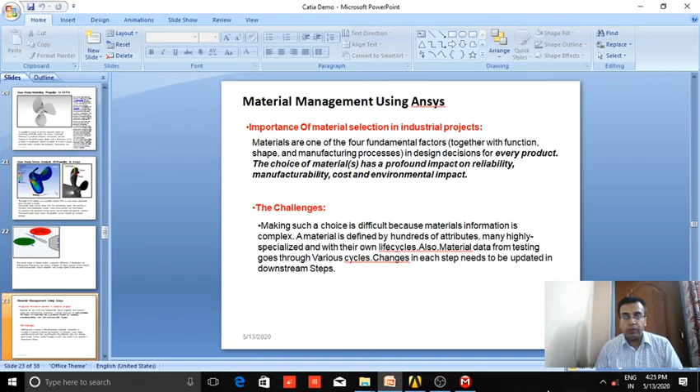Now we will discuss material management using Ansys. Now in industries, when any part or assembly of any product is designed, there are 4 important pillars that control its design. They are function, shape, manufacturing processes, and next is the material selection.

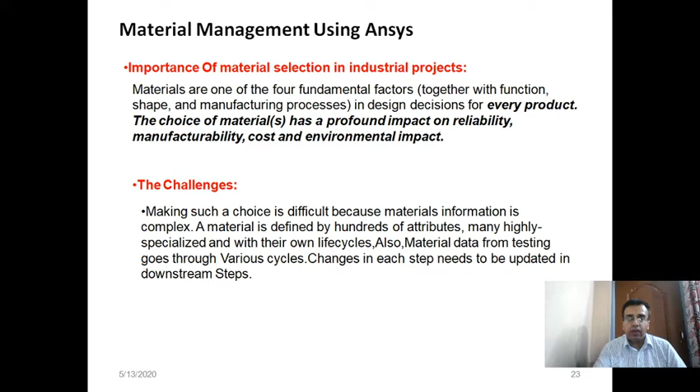And we also have to keep in mind that whatever data we are storing for a particular material in our company's database, along with all the properties we have to also incorporate the data which comes from testing. And if we make changes to any of the properties, what impact those changes have on the other properties and steps, this we also have to keep in mind. So this data needs a regular update. So that is another time consuming part.

The next challenge is to maintain a proper connection strategy between these factors. Now let me explain this cycle. This cycle basically starts from the render properties. Render properties means properties related to texture and appearance, then basic properties and detailed properties. Basic and detailed properties include information related to Young's modulus, Poisson's ratio, tensile strength, and different kinds of parameters.

Then again data from the testing, and all these parameters have to be input in our CAE model. For example, if we are analyzing a particular part in Ansys, we have to correctly input all this information in its material properties. Although the role of render properties here is negligible, the rest of the properties are very important.

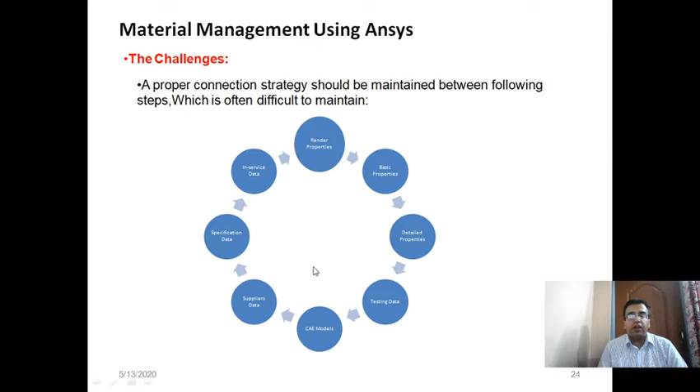Then we have to follow the proper system of units while inputting the values, because if we are not maintaining a proper unit system, then errors may come in our final result. And then the CAE model's material data has to be properly collaborated with suppliers, specification and in-service data also for further use. So we have to maintain this kind of complete cycle. This is also difficult, especially when the data related to the materials is quite large and complex.

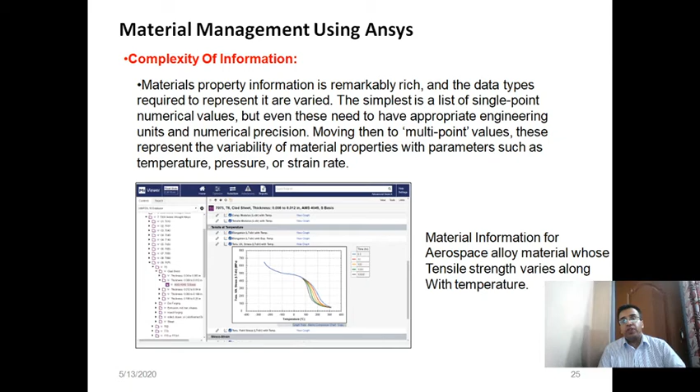Also, as I said before, sometimes we have to input properties in a material which have multi-point values, for example, properties which change with respect to temperature, pressure or strain rate. As we can see in the image, this is the property information of an alloy material used in aerospace applications, and here the tensile strength does not have a single value but varies with temperature. So we have to input all the values of the tensile strength with respect to change in temperature. So it is not a single point value.

Now next, it also happens many a times, जैसे for example मुझे एक मटेरियल्स के बहुत बड़े डाटाबेस से ये सर्च करना है कि for example, let us say I want to search an alloy material which is available in my plant which has a fatigue strength of at least 300 MPa at some defined cycle. So how I will do this? For example, मुझे इस बेसिस पर एक मटेरियल का सर्च करके उसे मेरे प्रोडक्ट पर असाइन करना है. So this will be quite time consuming and difficult for me to search from a large database of my company's materials.

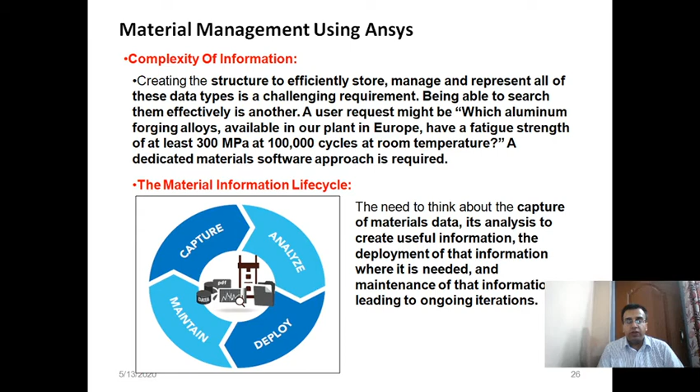Again, we have to make sure that for maintaining an efficient material information life cycle, we have to collaborate these four steps, that is capturing of the information related to materials data, its analysis to create the useful information, then use of that information in a proper manner, and maintenance of that information for the oncoming procedures.

Now, as in the previous session, I have discussed about the PLM. Now, at this particular stage, it is very important to understand what is a PLM cycle or what is a PLM software, to be more specific. So PLM का मतलब होता है प्रोडक्ट लाइफ साइकिल मैनेजमेंट.

बेसिकली एक PLM सॉफ्टवेयर किसी भी इंडस्ट्री में होने वाले हर एक तरह के मैन्युफैक्चरिंग प्रोसेसेस के पूरे डिटेल्स. For example, let us say that company is manufacturing an assembly of a car, then the information related to all parts of the car, their specifications, then vendor and supplier information, all that is being stored by the PLM software.

So in this respect, whenever we are transferring any data, for example the data related to geometry from our CAD software or the analysis data from our simulation software, we have to make sure that the material information related to this particular product in terms of CAD and CAE data should be in a proper manner.

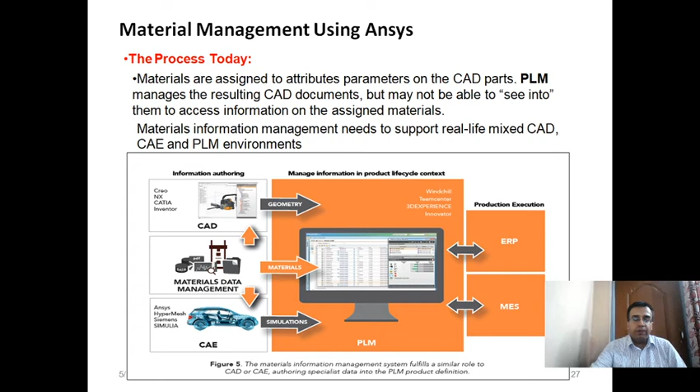Now, let us discuss what are the important factors which an engineer has to keep in mind when we are coming to selection of materials. The first is the definition of a material. For example, let us take a material which is at its raw stage. For example, it is just dug up from a mine. Then later on it is being heat treated or it goes through various refinement processes. Then its composition may change.

For example, we have a glass filled nylon or simply a strong stiff plastic. But going through the different kinds of refinement processes, the material specified for the procurement then becomes of a specific grade. Material का composition, material का name ये change हो जाते हैं whenever the material passes through different refinement stages in the manufacturing.

Then again, for example, if I have assigned a material in my CAD, let us say मैंने CATIA में एक पार्ट को कोई मटेरियल असाइन किया है by the name of aluminium, but it may happen that for the actual manufacturing process we have to specify an alloy of the aluminium and not simply the aluminium. So whenever that part comes in the Ansys software, we have to make sure that the name of the element is being correctly specified, because this information is ultimately going to be transferred into our PLM software.

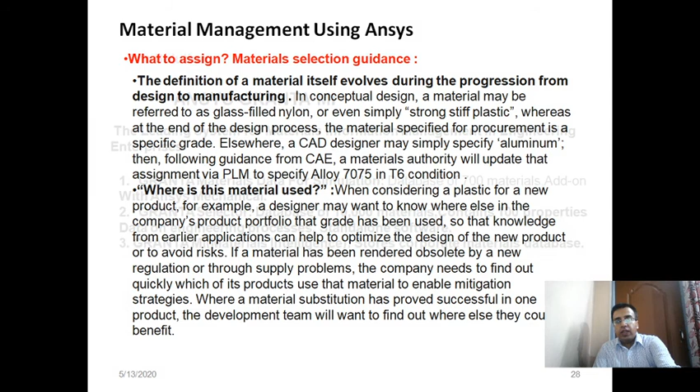So now, discussing all about these challenges, what is the solution? Now we have to talk about the solution. So in the next session, we will be discussing about a module called Granta MI, that is a module in Ansys Workbench which helps us to deal with these challenges in a